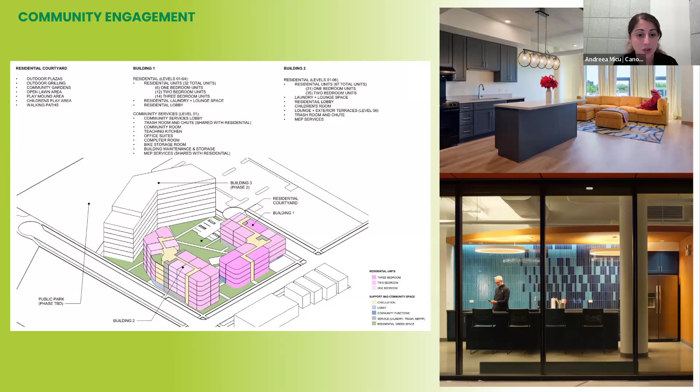We also added family-focused design elements like kids' log steppers in the courtyard, which we'll see later on, and also a dedicated children's room reflecting the feedback that we got from these community sessions. Another product of this collaboration was the Encuentro Health Action Plan. This plan helped guide our design decisions, and it brought healing-centered design principles and a trauma-informed design approach to the forefront of the project. Next slide, please.

The overall massing of the project encourages dialogue between the buildings and the open space. We brought a trauma-informed design approach to both the site and the architecture. We designed every facade to be welcoming. There is no back or alley-facing side of the buildings. Instead, all sides face spaces where people gather, walk, interact, helping foster safety, inclusion, and dignity.

On the north side of building 2, which is that 6-story larger building, we designed a vibrant feature wall that celebrates the community, drawing inspiration from monarch butterflies to symbolize migration and resilience, echoing the stories of many families who call this neighborhood home.

We also introduced front doors and private patios along Cortlandt Street, which is shown in the image on the right, to respond directly to the neighborhood context, especially the adjacent home across Cortlandt. Building 1's entrance is set back at Cortlandt as well to provide a small public plaza at the 4-story building's entrance. Next slide, please.

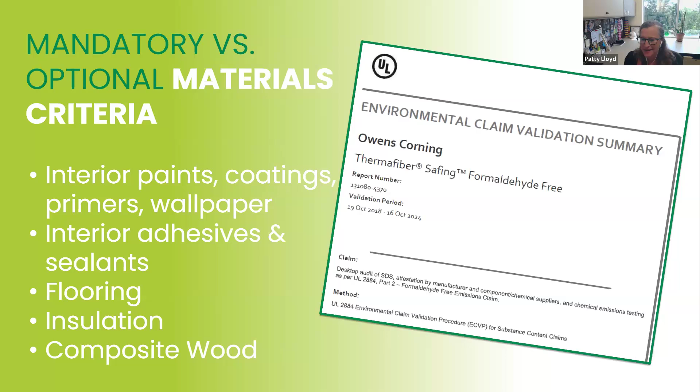Insulation at that time was a long lead item that had been ordered, and we were able to stop the order of the non-compliant product before it shipped to site and replace it with a formaldehyde-free material as far as it relates to the batt insulation. So that was a great lesson learned for us. We've definitely got the materials criteria down now. We're on many Enterprise Green Communities projects, and so next slide, please.

So one other kind of cool thing that happened for Leopardo as a result of this project is we really were able to add a new skill set to our toolbox of what we can deliver on a sustainable project. As you saw earlier on my slide about the intersecting sustainability criteria and how many there are, they all had like a blower door testing criteria. 3 of them did. And that means that we're testing for air leakage in the units. And Emily's going to talk about that more.

But for us as a contractor, to have testing that you have to test until you pass was a pretty significant thing, because there's no not passing, you have to pass. And so EcoAchievers had encouraged us to pursue maybe self-testing our units before the professionals come in, because they felt like it would save us on our schedule. It would obviously make it a little bit easier for them, and it would protect the owner from added costs due to schedule increase. And so we did take their advice and buy a blower door testing kit.

We sent our sustainability associate, a superintendent, 1 carpenter foreman and 2 carpenters to training, and they all got certified with this DET verifier training, so duct and envelope testing.

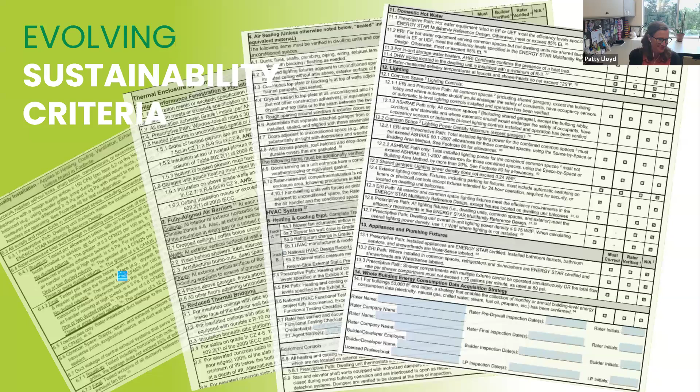Thanks, Patty. I'm Emily from Eco Achievers, and I wanted to start off adding to something that Patty was talking about with the intersecting layers of sustainability criteria. So an additional thing that happened right when this project was starting is the fact that this sustainability criteria evolves over time, and especially in the last couple of years.

Energy Star in particular has evolved significantly. And right before this project started, they came out with a new version of Energy Star, where the previous version was more geared towards single family. You could use it for multifamily, but the language was geared towards single family. So they recognized that and made a split. So there is now Energy Star single family new homes and Energy Star multifamily new construction. And this project needed to follow the new Energy Star multifamily new construction.

And what happens with Energy Star when it changed is that the requirements just about doubled and the complexity of those requirements increased. So that was just an added complication at the beginning of the project, that even though at Eco Achievers we've done many Energy Star projects, this was one of our first multifamily new construction projects. And there were a lot of details to figure out and footnotes to digest and questions to the EPA for confirmation. So that was just a little bit of an added detail there.

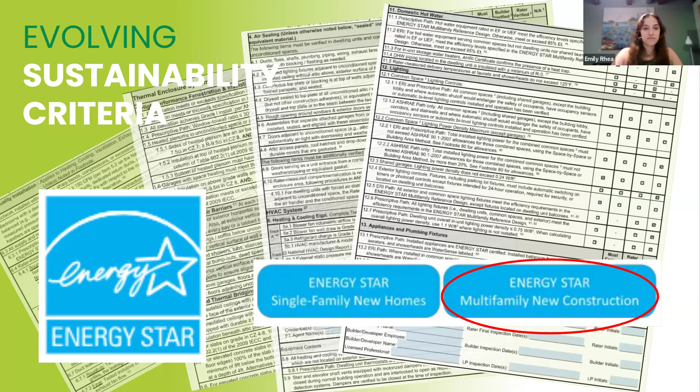So within the Energy Star program, and I know there's lots of different certifications that were on this project, but Energy Star has a lot of requirements that we have to verify on site. So I'm focusing on the Energy Star requirements here. There are a lot of testing standards and performance requirements that we have to verify. And of those, I've listed many of them here.

Insulation quality, blower door testing, as Patty mentioned, and there are different requirements for Energy Star versus ComEd. So knowing your requirements for your different certifications is really important, so you know which one is the most stringent for your project. Duct leakage testing is required. And again, these are all things that you have to pass. They are mandatory. Ventilation testing, exhaust testing, bedroom pressures.

We have to verify all of the mechanical systems and the appliances in the units and in the common spaces. And then there's also minimum filter rating requirements that we have to verify on site. So the various sustainability programs have items that need to be verified in design and documents submitted. But then for Energy Star, there's a lot of on-site verification, both with testing and verifying that the details that were put forth in the design are actually completed on site.

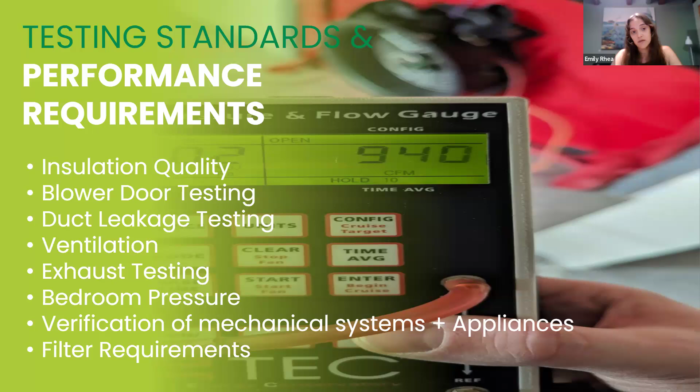Of these testing performance requirements, the first 4 tend to be the most difficult for teams to achieve. So I'm going to talk a little bit more about those.

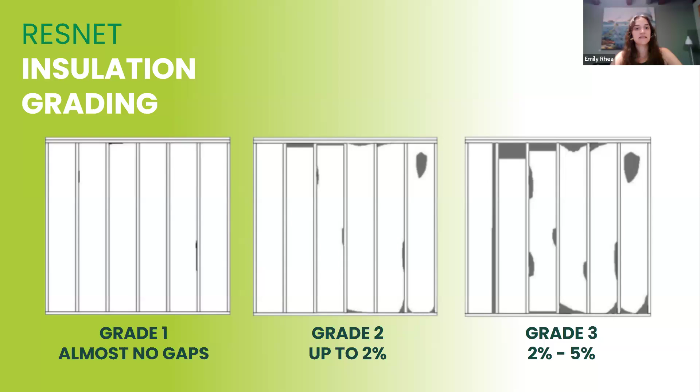So here are a few examples from Encuentro Square, where at first this was a complication for the team, and that's not uncommon. It is a sticking point for a lot of project teams. And so we did have to come back a couple of times before the insulation contractor really got it, which can cause delays. And obviously that's not what we want, but it has to be corrected until it is meeting the standard in order to continue.

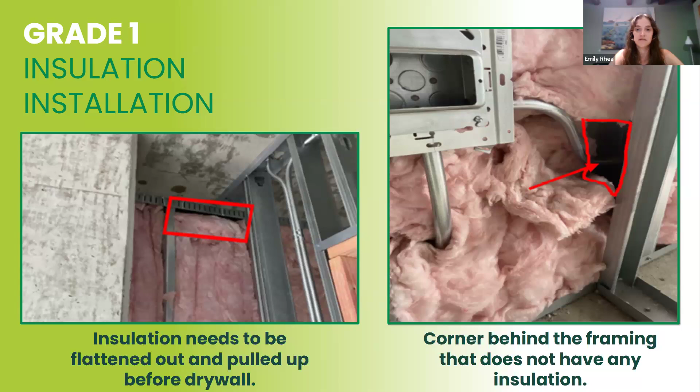So just a few examples of insulation. On the left, the insulation isn't fully filling the cavity. It's kind of fallen down a bit and not filling that top space. And on the right, it's not filling the space behind the stud. And as I mentioned, you can see that it is cut to fit around the conduit, which is an important feature to make sure that insulation is correct. But after a couple of visits, we did get it down, and then smooth sailing after that to complete all of that insulation. Next slide, please.

Thanks. The other testing that I mentioned that can be problematic on projects was the ventilation, duct and blower door testing. For ventilation, one interesting thing on this project is that there are very sensitive controllers for the CFM, the rate of the exhaust in the bathrooms. And so that was something that kind of had to be tweaked, but wasn't a huge problem. And that ultimately was fine, but just not a super common problem there.

Duct leakage was really interesting because these units are in closets and in tight spaces, and we have to connect to the return side of the unit to do our testing. The unit itself and the ducts, the full system is tested for duct leakage testing. In a number of spaces, we had to do some creative configuring in order to be able to actually test it.

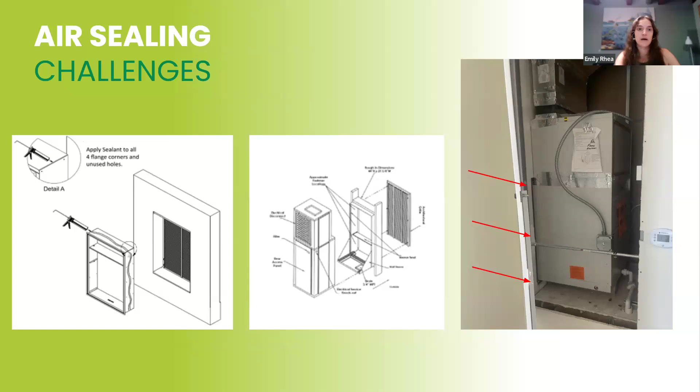My name is Mark. I'm a senior project architect here at Canopy, and I'm going to jump into some of the details that we had to come up with in order to meet the Energy Star multifamily new construction and ComEd affordable housing new construction program requirements. So we'll focus on a few key items, one being the reduced air infiltration that Emily just went over with some of the challenges with the VTACs.

And then the other two will be high performance glazing, which was required by the ComEd grant. And the last one will be reduced thermal bridging, which is required by the Energy Star program. And a little bit about our envelope here. We have a metal panel rain screen system on both of our buildings. We have continuous insulation, R8.6 to be exact, and then our cavity insulation is about R21 fiberglass batts. Next slide, please.

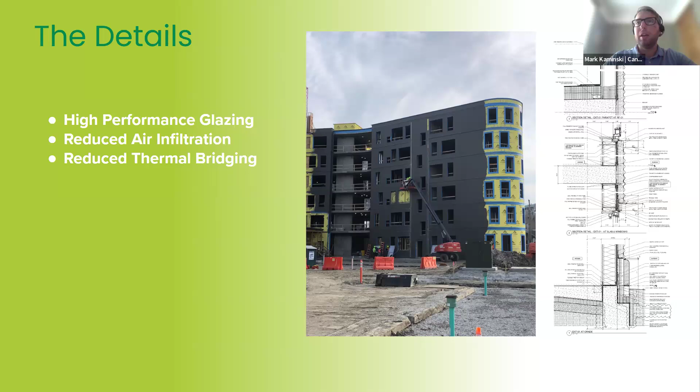For the glazing requirements from the ComEd grant, we were required to hit a U factor of 0.27 at our residential windows and 0.35 at our storefronts and curtain wall locations. And in order to hit that 0.27 U factor, we used a UPVC window from a manufacturer based out of Europe. They were one of the few that were able to actually hit that 0.27 number. And we utilized Intus for our residential windows, specifically their Supera 74 line. And the glazing in these units is Guardian glazing, the SN51 product, and that helped us get a U factor of 0.24 for our residential windows.

At the curtain wall and storefront locations, we used a Kawneer thermally broken aluminum curtain wall system at both locations, mainly due to the curving geometries we had. So that proved challenging to find a system that could conform to these geometries, and the Kawneer system was actually able to give us a customized angled vertical mullion that allowed us to achieve the splay connection there in the curve that you see on the bottom left image.

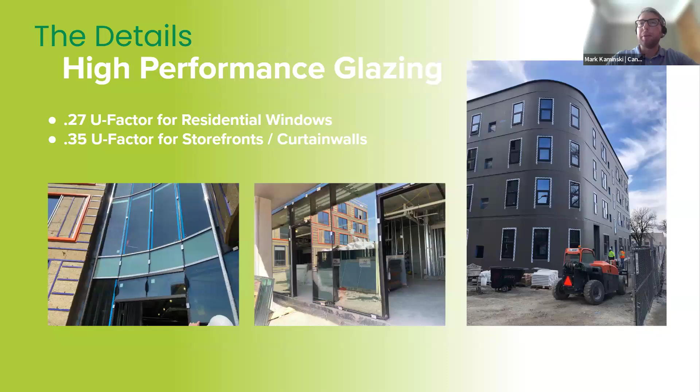And for the glazing at these locations, we used a Viracon VNE 1-63, and it gave us a U factor of around 0.25. So we exceeded that 0.35 minimum with our glazing units there. Next slide, please.

Reduced air infiltration. As Emily mentioned with the VTACs, we also took special care at our window openings. With the windows, we actually used an interior air seal here with backer rod and sealant. So if you see in the detail, we actually tie in our window to the air barrier system with that sealant there between the window frame and the back dam. And putting the air seal on the interior side had a few advantages. One of them being we could easily inspect that seal, as you can see in the bottom middle there. And it's also protected from UV exposure and any extreme temperature changes as well.

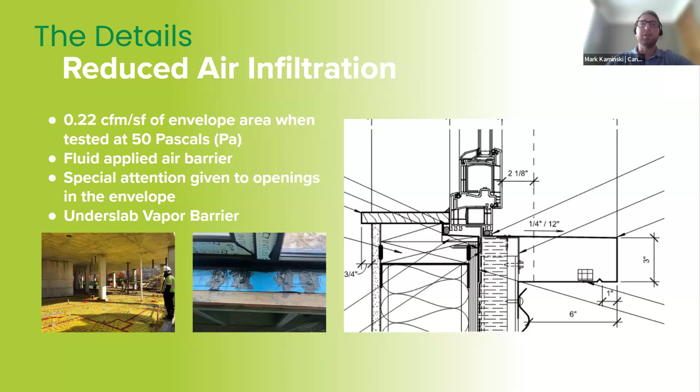And then another challenge that we had to face was at the larger openings, we actually had to utilize a secondary attachment clip in addition to our nailing flange. So what we did was we actually extended our air barrier transition membrane into our rough openings a bit further, so we could capture those clips and then also cover those with sealant to avoid any air infiltration at those locations as well. We also have an under-slab vapor barrier, and we also have infrastructure for a future radon mitigation system if needed. Next slide, please.

So with the complicated geometries, air sealing these curves presented a challenge to us. So in order to overcome these challenging geometries, we called for a fluid applied air barrier system to be used, or in our case, it was spray applied. So we used Henry's Air-Bloc product to achieve our continuous air barrier here.

And these curved walls also proved a challenge for the window openings and how we were attaching our windows in these curved walls. So what we did was we actually developed a detail where we overframed the window opening, the rough opening in the curved walls here, and blocked it out so we could create a flat surface, particularly so the nailing flange could be fastened to something flat, and then we could flash and tape our flanges on the exterior. And you can see how we did that in the detail there on the right. Next slide, please.

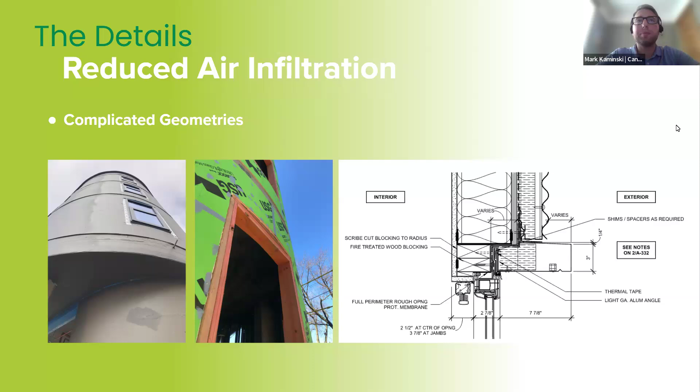All right, reduce thermal bridging. So as part of the Energy Star program, we had to take special care to reduce our thermal bridging. So we had to develop a couple interesting details and use a couple really neat products. One I really liked in particular was using this fiberglass subgirt product. Fiberglass is much less thermally conductive than metal, so using this was obviously a great choice for us.

And then one other unique product that we ended up using to help achieve some reduced thermal bridging was at our cast stone base. We actually used a high density polyurethane foam to maintain our continuous insulation to extend 2 feet below grade there. And we rested our cast stone on that foam, which had a PSI of about 350 and is R-2.5 per inch. So our 3-inch block there helped us maintain our continuous insulation minimum of R-7.5, which is based on the previous Chicago Energy Code.

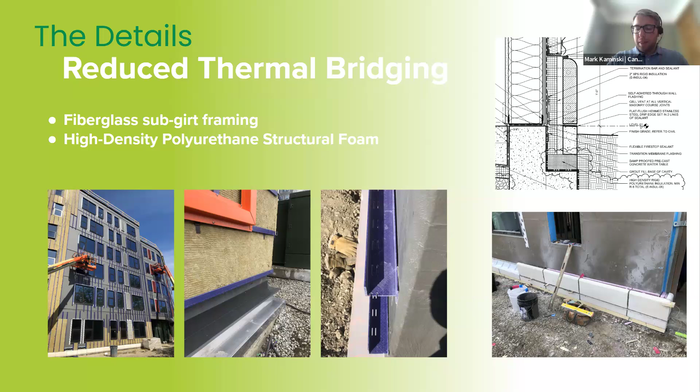And I think that's it from my side. I think I'll throw it back to you, Miranda. Great. I'm going to turn on all the things, turn off all the things. Can you guys hear me okay? Yes. Awesome.

Well, thank you all so much. That was a great presentation and so many lessons learned. This is like the perfect webinar that we like to see, that people are able to showcase the tangible things that they are able to learn from a project and let others learn from it as well. So I really appreciate this presentation as a whole. We have a couple questions in the Q&A, so I will start at the top.

Was TPL the client developer or another entity? How was a 100% affordable development economically viable or advantageous for them? Was it through government programs, grants, incentives? Sounds good. I could take that. So there were two developers actually. It was co-developer Lucha, and as well Evergreen Real Estate Group. And Evergreen Real Estate Group right now is managing the property as well.

In terms of financing, it was a twin transaction between 4% and 9% LIHTC, which is the low income housing tax credit. And it was a little bit complicated because we didn't split the financing building 1 versus building 2. It was mixed for both. So, for example, units from building 2 and common areas from building 1 would be one transaction, the other one would be the other transaction. And big kudos to Leopardo to be able to do 2 different contracts, 2 different subcontractor contracts, 2 different pay applications, and all that paperwork that needed to get cleared up. And also big kudos to the development team as well on that.